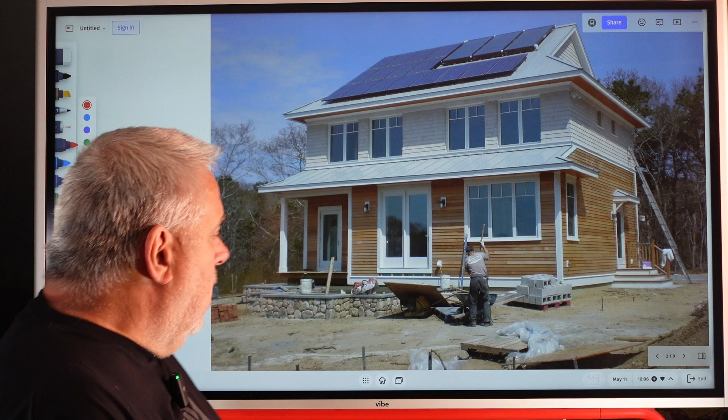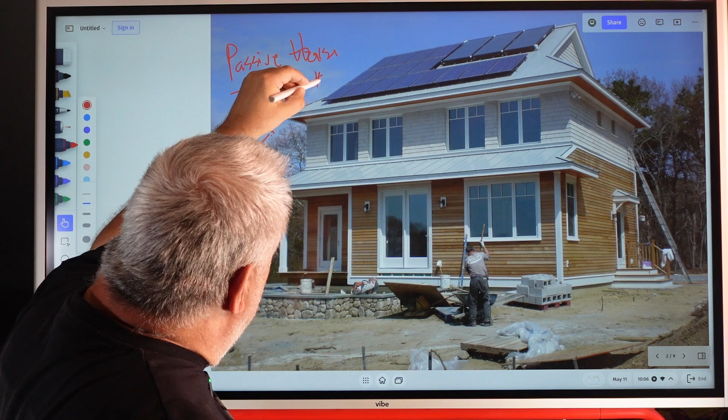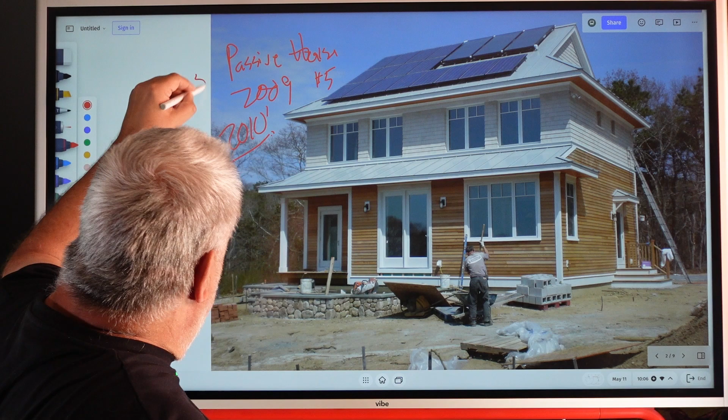Passive house. This was the very first one I ever did. I designed it in 2009. We built it and certified it in 2010. I want to say it was number 5 on the passive house roster in America. It's in Climate Zone 5. It's, yes, up here in New England. It is literally right on the water. You'll see that when we see a couple of these interior photos.

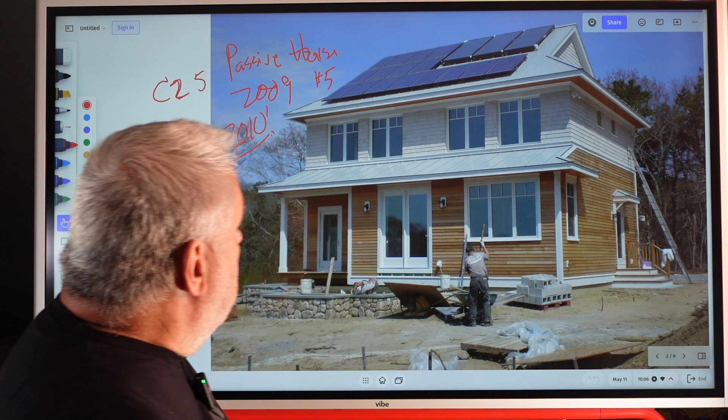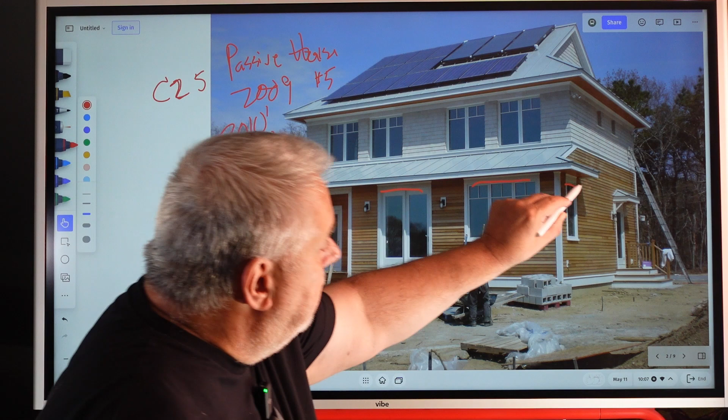And as the third part to our mini window series, which is part of the larger series in general, we're going to talk about the heads of windows. Now, the interesting thing about the head of a window, and when I speak of the head of the window, you know I'm talking about the tops of the doors and windows, right? Now, there's something that all of these windows have in common, and then there's a few differences. Let's talk about what they have in common.

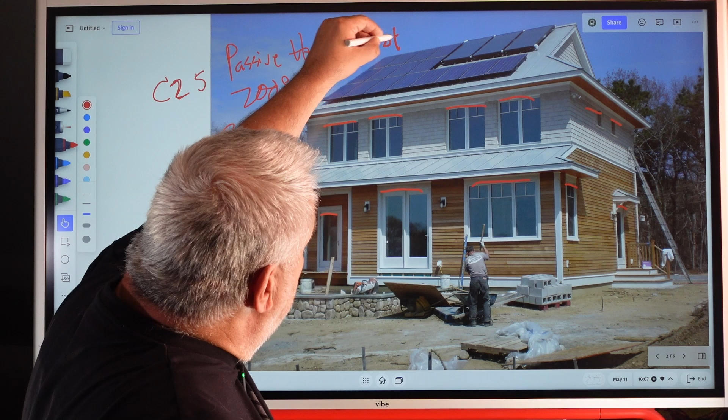If a window's going to leak, the greatest chance of leakage is probably at the head of the window, right? It's kind of like if I go outside in the rain, the most sensitive part of my body to the rain is my head and face. So what do I do? I protect it. Protection, right? I put an umbrella over it. Look at all the heads of the windows here. They all have an umbrella over it, right? They all are protected. I treat my houses the way I want to be treated. How about that?

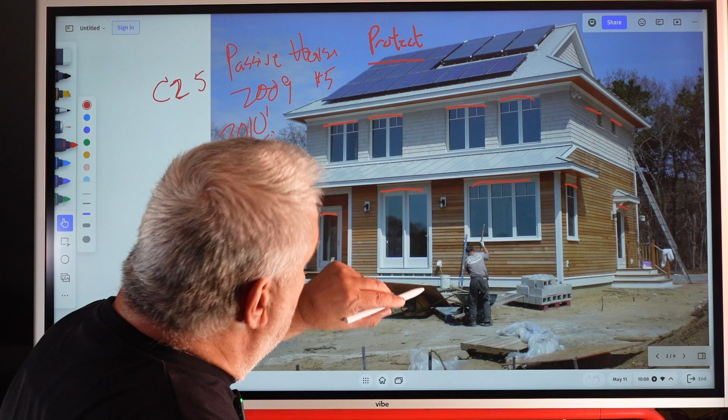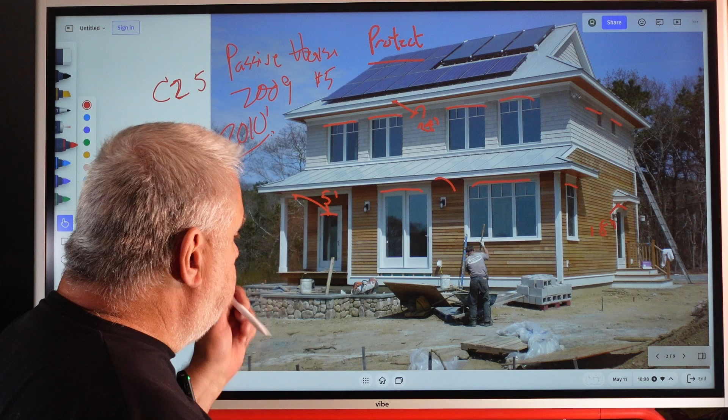And they're all very well protected under some significant, this is on the order of a 24-inch overhang. The same here. This is probably close to about 5 feet or more there. And over there we have at least 18 inches that we're protecting the heads of those windows. So let's talk a little bit about those windows. You can see here, this is a 2-story wall. Not a whole lot of protection there, right?

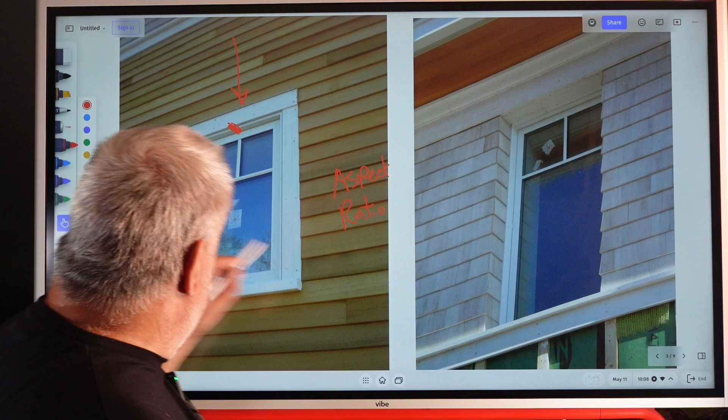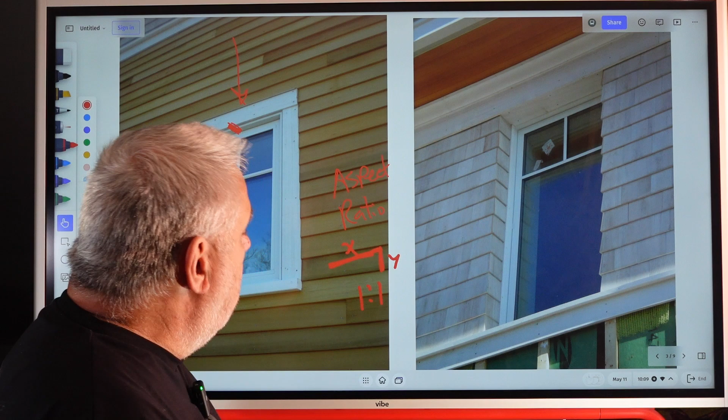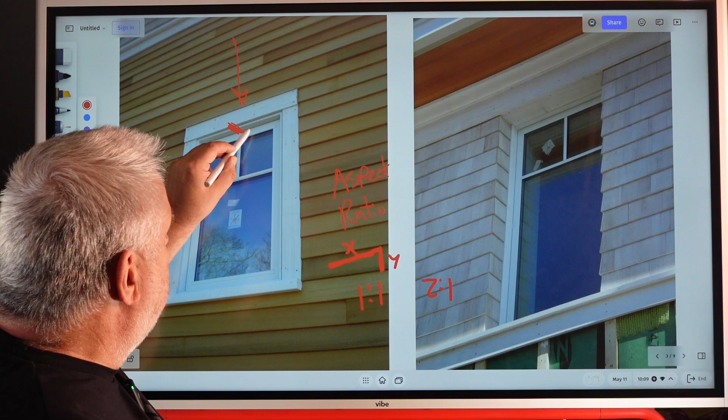And there's this thing, I call it the aspect ratio. The aspect ratio is pretty much how much protection do I have horizontally versus the distance above the window to the wall. So this really for me wants to at least be 1-to-1. If I can get it 2-to-1, where the X dimension is twice the Y dimension, then yeah, I'm extremely satisfied. This one here, our X dimension is very, very little, and that's actually a function of the frame. There actually isn't any overhang here.

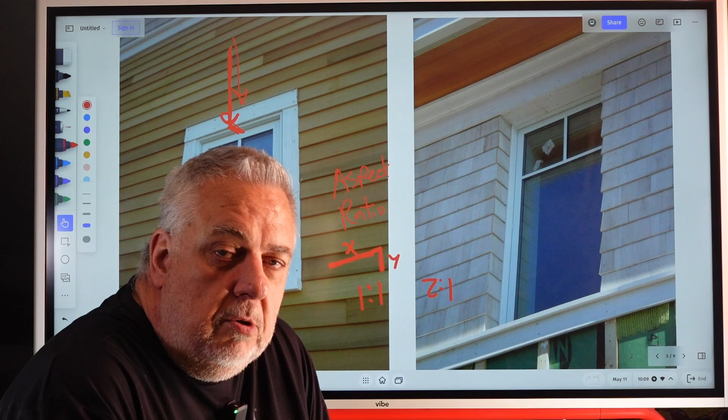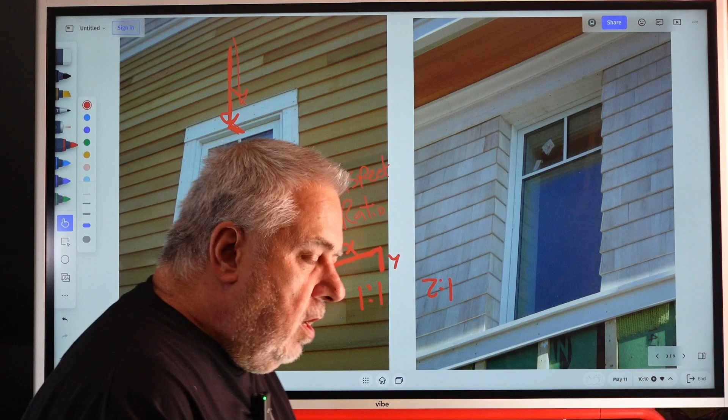So our aspect ratio on that one is somewhat nil, which means that window is one that I should have some of the most concern with, right? Because the execution for flashing and sealing and all of those good things happening to that window have to be spot on. Because we're again in a high wind zone right on the water, that window is going to get tortured.

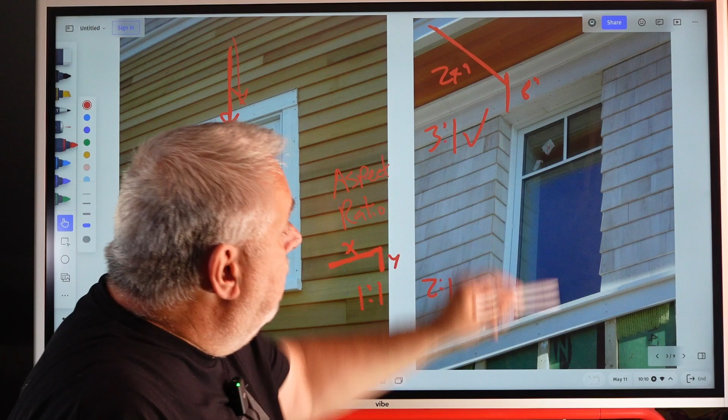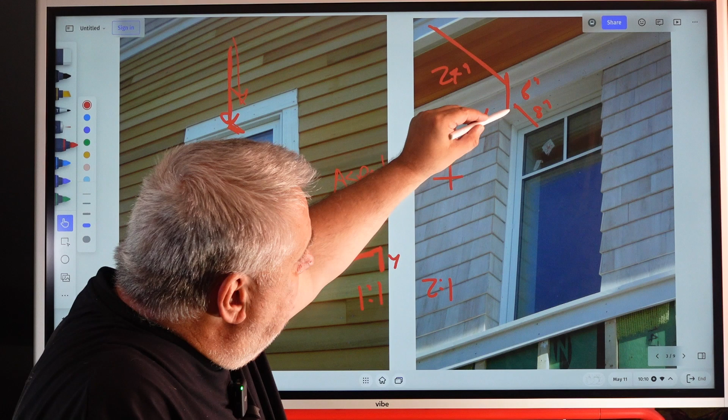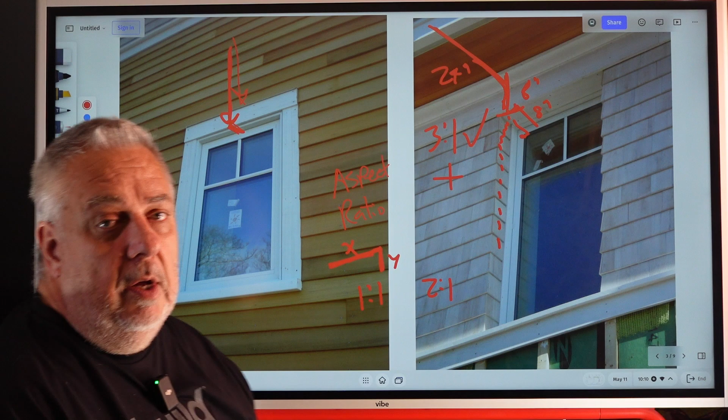This window, however, look at this. We have 24 inches there, about 8 inches there. So that's a 3-to-1, right? That is really good. But it doesn't stop there. We actually have another 8 inches. So it's a 3-to-1 plus, I would call it. And by having this drip, if there was a driving rain that somehow made it here, this water would want to drip down before it travels inward to that window, right?

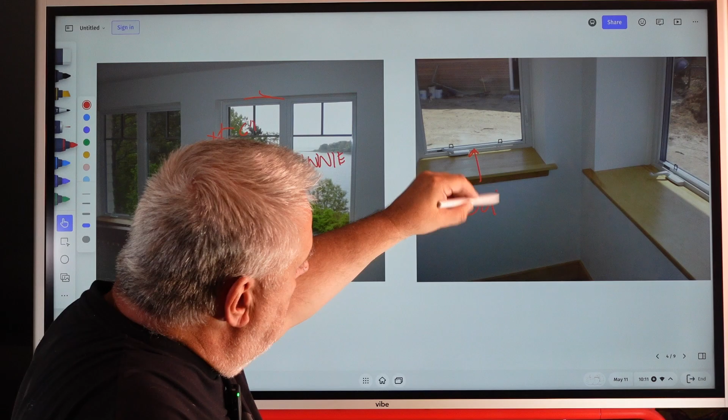Window heads, you know, this was a pretty simple house. These were all drywall returns. You can see this is a very simple one. We're probably on the order of maybe about 6 inches of reveal there. So this one here, because it's in the middle of the wall, some people would call it middies. You can see the clapboard or shingle siding on the outside and then the interior there. So that one's in that mid portion of the wall, or in this case, for my explanation, I've been calling this the innie. And then notice here, this one's pushed all the way out, and we'll call that the outie, right?

So the outies are certainly at more risk because we have absolutely no protection above that. Water comes down, it comes down to the window top, and it immediately challenges that window, as opposed to the windows that are inside. Water comes down and it still has some lateral ground to cover.

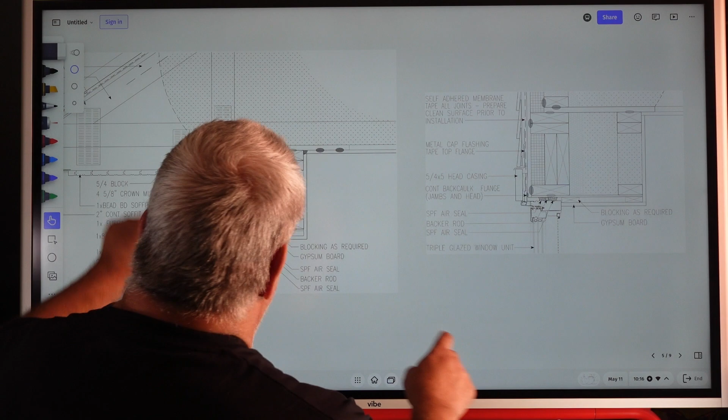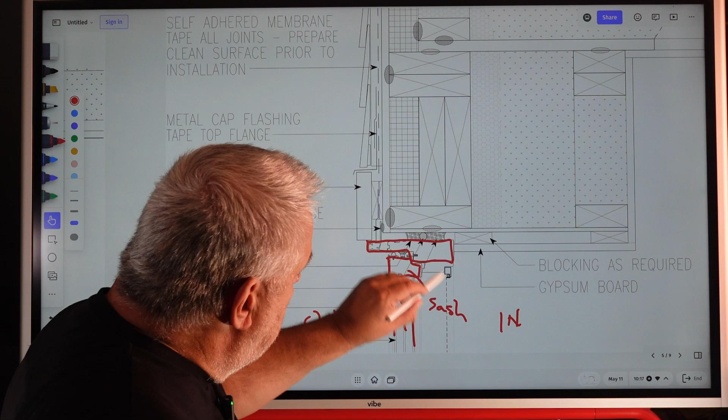All right, so here's the details. We have that kind of mini outie, or innie. Let's focus on the outie first. So make this nice and big, and we can talk about it. You know, very similar to the jamb and sill detail. We have our window frame. This is inside, this is outside, right? You can see our triple panes of glass. This is our sash. And this is our frame, window frame.

And notice the window is pushed all the way outside. So unlike the sill where you pull the window into that middle third as an innie or middy, you expose the sill and it becomes a very high risk. Here, we push the window all the way out, and while it helps the sill minimize risk, it puts the head in a very vulnerable position to leak and not be able to drip water away, and get rid of it by sliding it in, increasing that aspect ratio, and providing a little bit of protection.

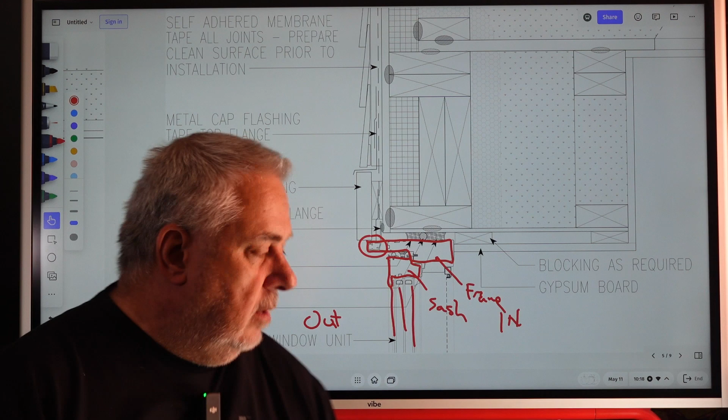Now, notice our sill detail, our jamb detail, and our head detail. Well, yes, they're very similar, right? For me, when I think about detailing a building, the first thing is success, or function. Does that detail work? Does it push water away? Does it handle the 4 control layers in a way that I need it to?

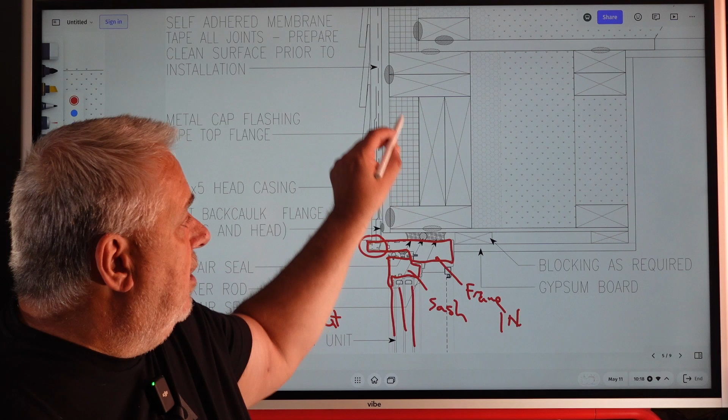Secondly, is the window detail simple, or is it recognizable, right? Are there things in there? Yeah, okay, we have a 2x6, we have a header, this one's insulated, we have ZIP sheathing on the outside. All of those things are very compatible with standard understanding of construction of the day here, right?

And then lastly, is the detail executable? So I can recognize some things, but if you're asking me to cut and twist and bend and fold and do a whole bunch of things, then it really places that detail in question, that it's recognizable, but it's really not simple, and it's really not functional, because if I'm having a hard time executing a piece of flashing tape, then I put that flashing tape at a much higher risk, right?

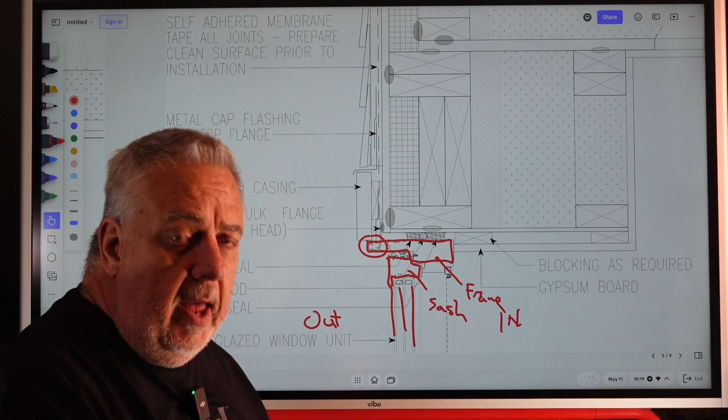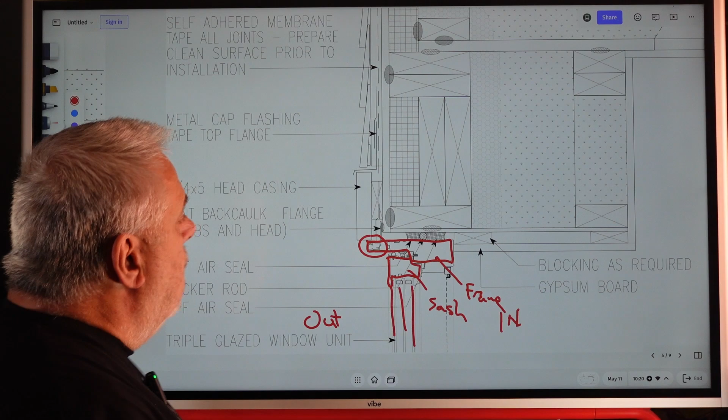So anyways, making the details somewhat homogeneous across the sill, the jamb, and the head gets us to a point where we have a really good understanding. The builder has a really good understanding because they're doing the same thing down here that they're doing here and that they're doing up here, right? Unless we have cause for some concern where the sill's at more of a risk and we have to add a little bit more there. But the window's pushed all the way out. This one here, we call it the outie.

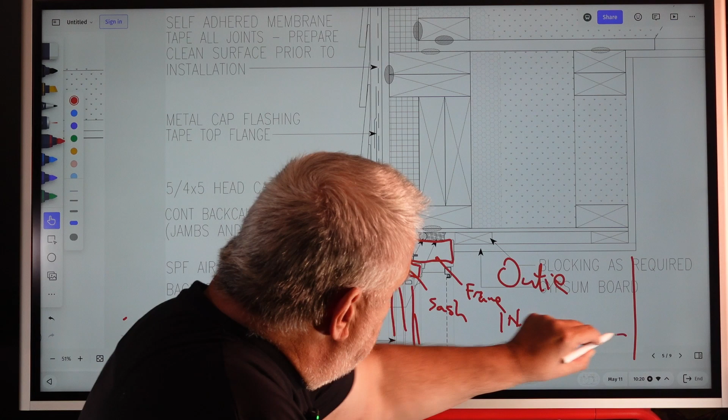And yes, if you can hear them, those are my dogs downstairs and I'm about to kill them. I own 2 Great Danes and they're literally below my studio here. It's early in the morning and they know I'm up here, so they're yelling at me. So yes, it's not limited to the women in my life, my wife and daughters. It's my dogs too. Take advantage of me.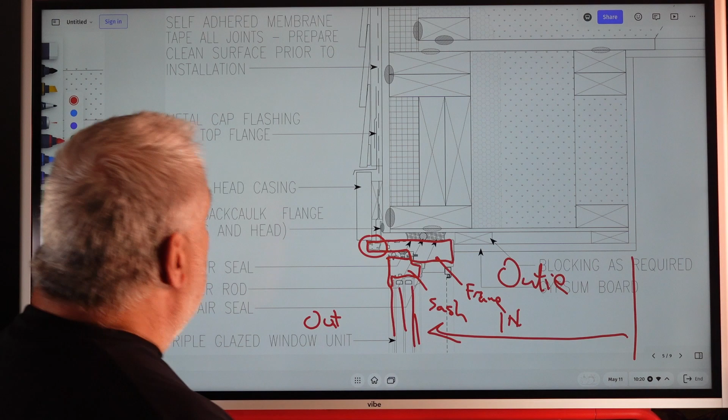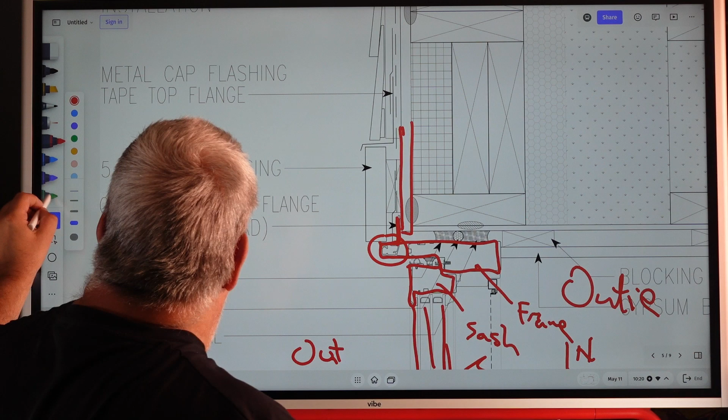So, a couple things of note here. Notice the layer of double protection, right? So we have our ZIP sheathing that comes down onto our framing member. We have our nailing flange there. We then have, in this case here, a membrane on the outside, and this is taped, and there is a gap here. And notice that's probably on the order of maybe 3/16". And it is not caulked.

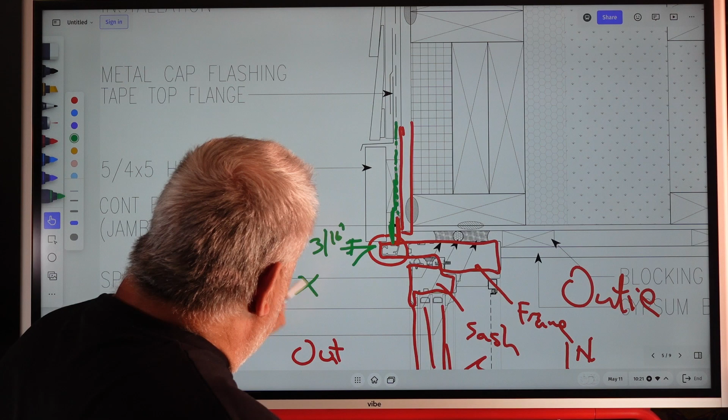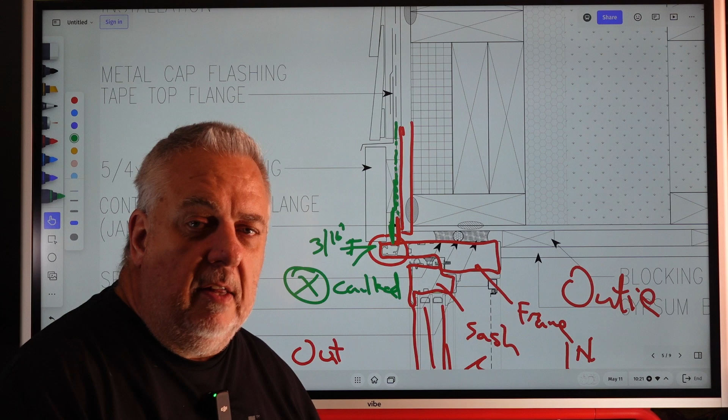I know, the sealant companies of the world are going to hate me, but the minute you pull out a caulk gun, the very first question you should ask yourself is, what am I sealing in? If I seal that and water gets in here, it's either going to be forced in or it's going to sit out here and rot something, right?

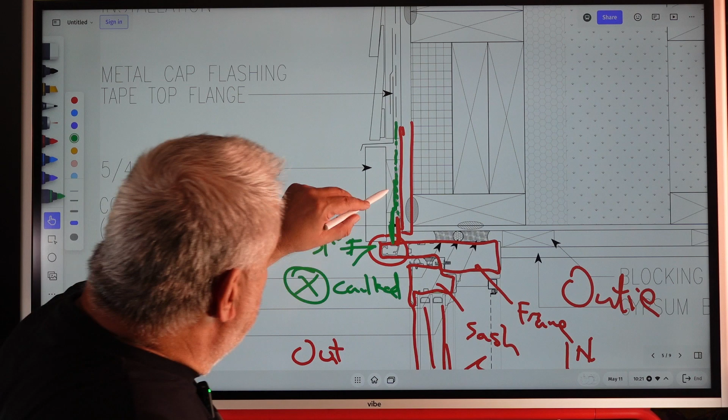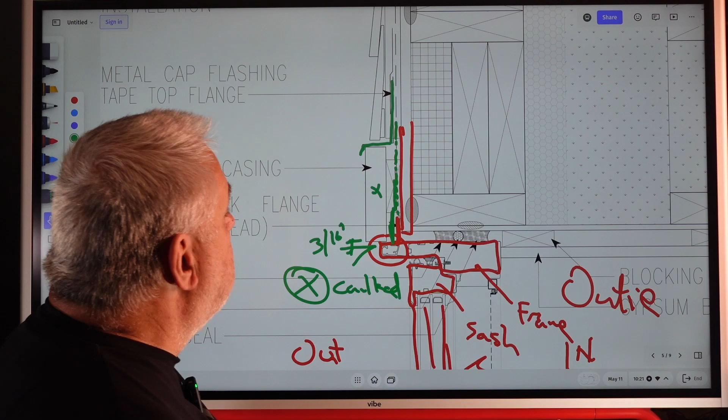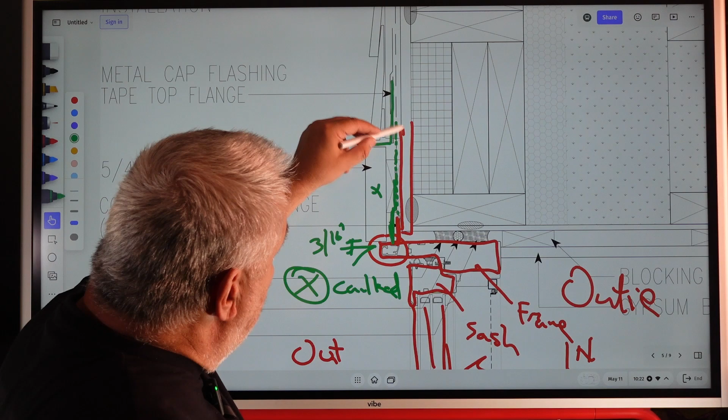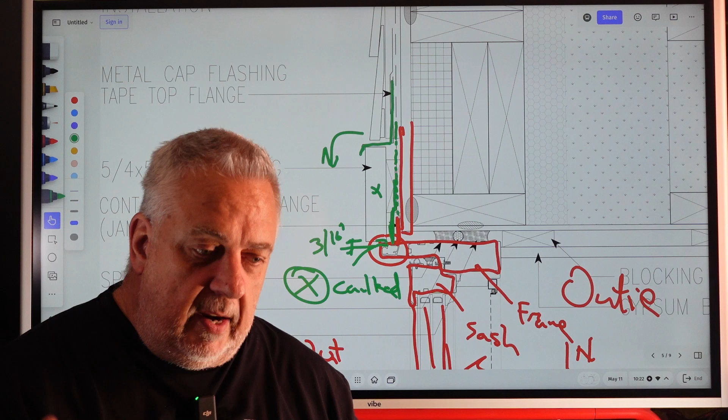By having that 3/16" space, anything that gets behind this flashing, right? I have a piece up here also, and that's flashing my trim piece there. So that's kicking water out above my head casing, but below my siding, and then that's taped back to the system. But if any water did get into that system, I have that little 3/16", let's call it a relief valve, and we can absolutely push the water out through there should any get in, right?

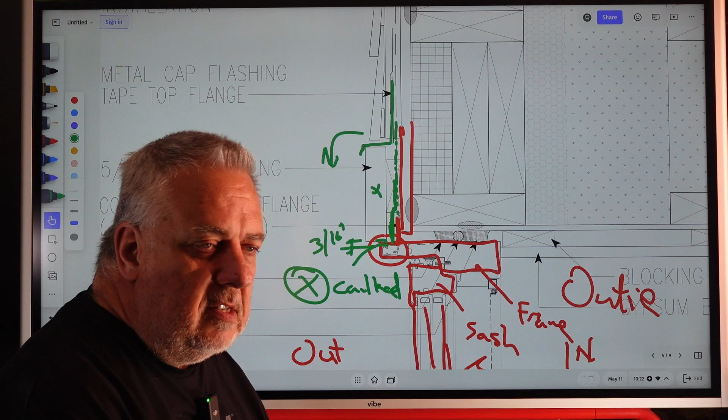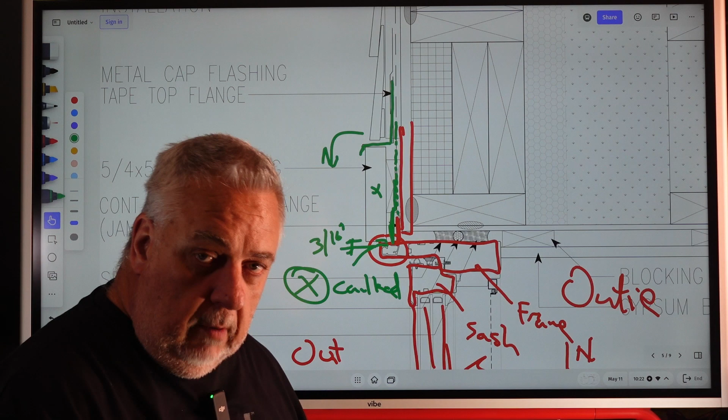So, and notice that's not caulked. You know, it's one of those things, I know sealant, a lot of people use them. One of my pet peeves is returning to a project 4 or 6 months later and the caulk is, you know, instead of being the white that it was, it's now a dark gray because it's gathered up a bunch of dirt, and it just never really looks good to me. I would rather just have a little shadow line, open joint, knowing that water can certainly get out if I need it to.

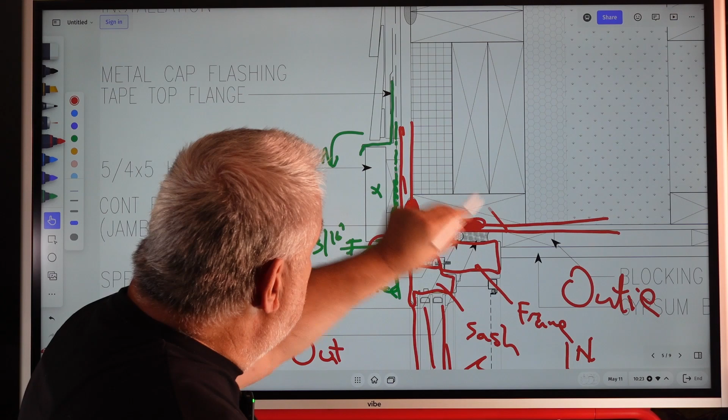So my zip on the outside, my closure piece here, and again, belt and suspenders. This is taped, that joint, but I also have beads of sealant. So I'm sealing this to the framing member, sealing this to the framing member, which means this is sealed to that by virtue of a few smaller connections there. And then that gives me basically a weather-resistant barrier on this plane and primary air barrier. We'll call it the PAB. Yeah, we coined that right here, the primary air barrier.

And so we come in and we put in our backer rod. Looking for that word. And then expanding foam sealant, inside and out, and that basically makes the connection from our window frame to that piece, right? And that piece is connected to this piece, our primary air barrier, and that piece via some weather stripping connects that to the sash.

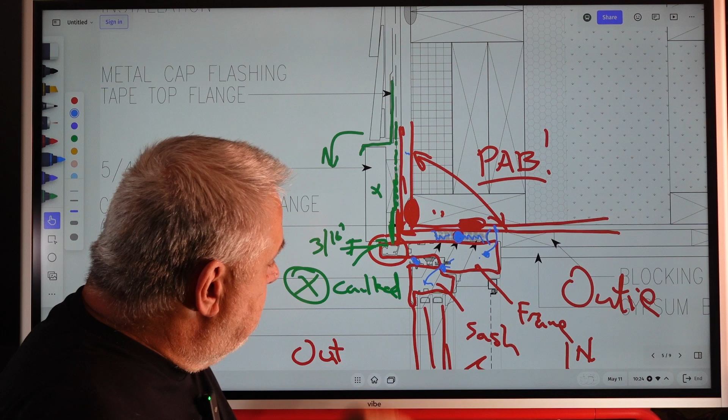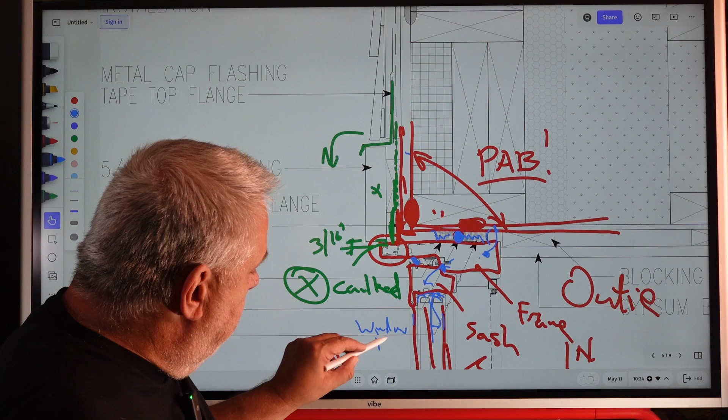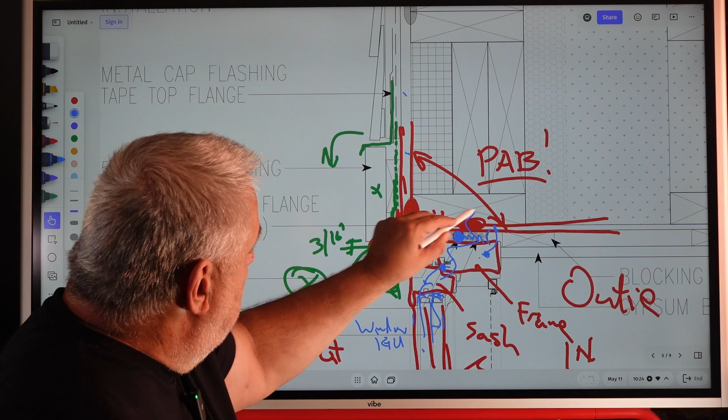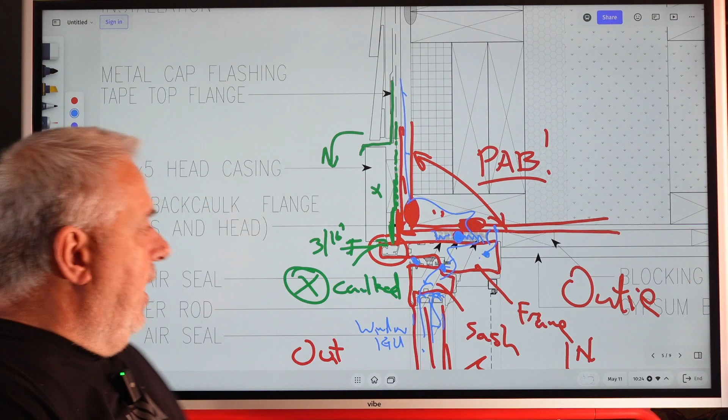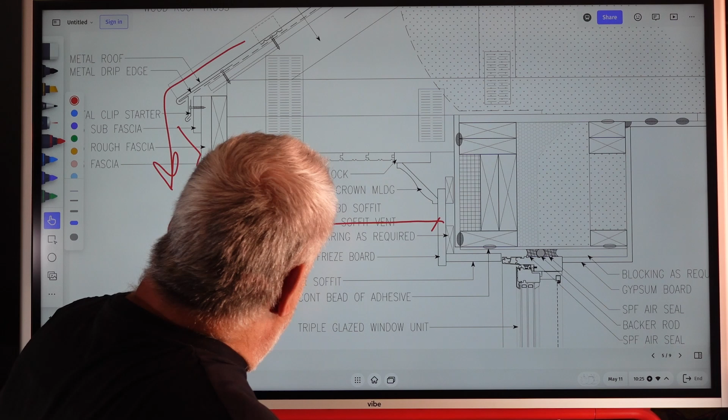If we come over here and look, this one here, I can't move that all the way over because this one is on the roof. Let's look. We have water. It falls there. If water does fall there, we provide a drip there, so hopefully it falls there. But if not, we have this 24 inches. This is about 8 inches, right? 3 to 1 on that aspect ratio. Also notice, if water did get in, there is no sealant there being shown. So we can drip water out.

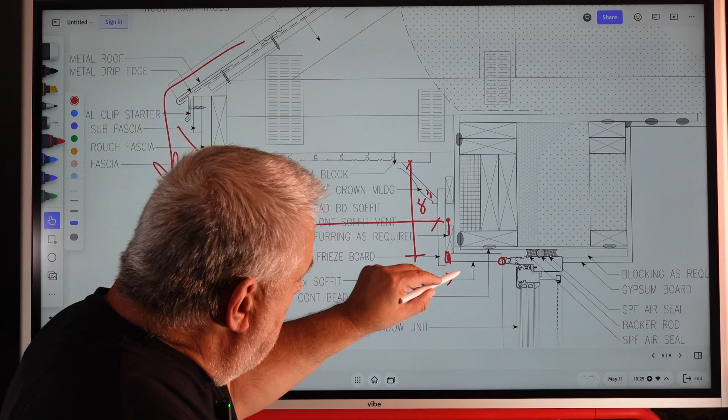A lot of times, and I didn't do it here, but I would have in the past, I'd push this up a little and I would have a little gap here because you're never going to really see it when you look up. You're going to see this bottom edge. You're not going to see that. But a lot of times I'll provide a 3/16 inch gap right there. And so if any water gets in behind all my trim system, it can just drain out, and it drains out well in front of that window.

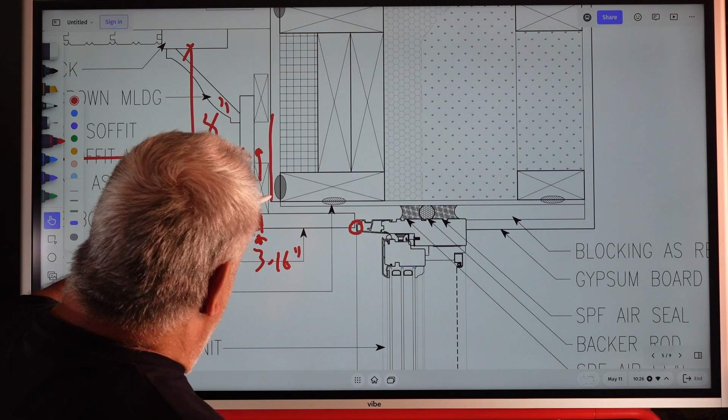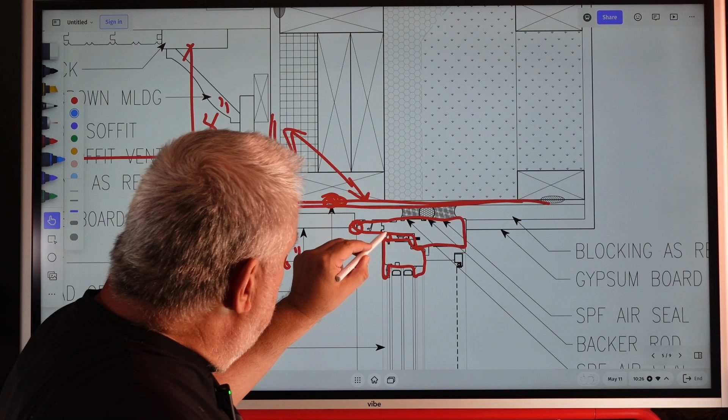And then coming in here, pretty much everything looks very much the same, right? Our primary air barrier there, and across here, our bead of sealant, bead of sealant. So those two get connected. Our window frame, our window sash, right? And then we have the connections of weather stripping there, the IGU connection to there, our backer rod there with some expanding foam there, and there, this connected to that, connected to that, connected to that, and it goes around the house.

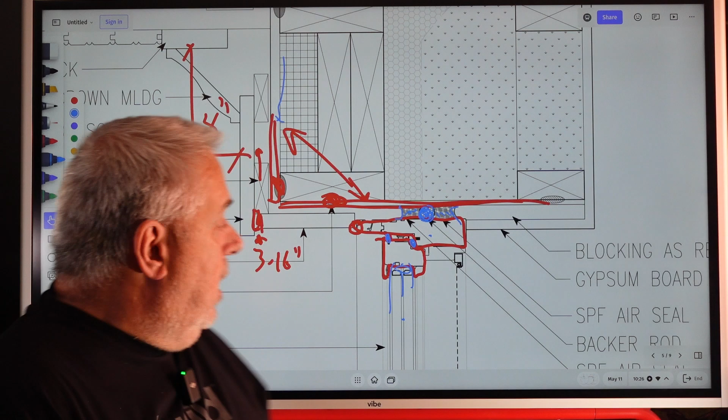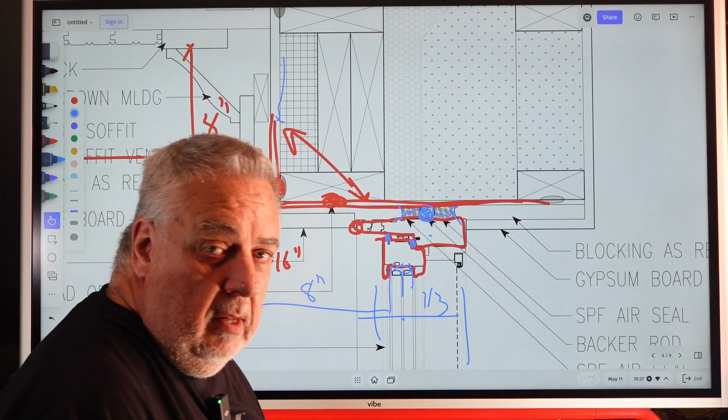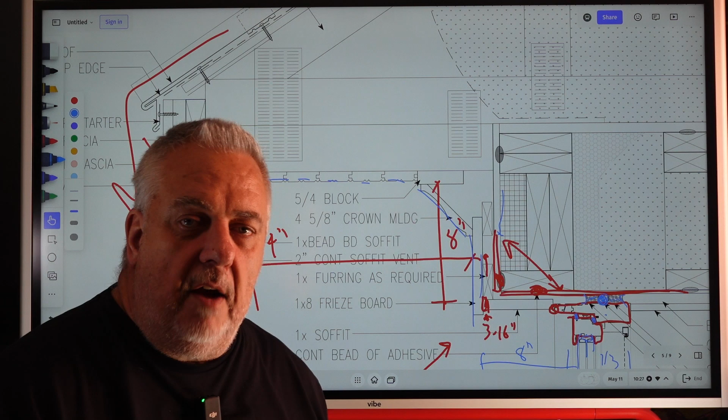As far as water management, I get that additional 8 inches here. For the energy nerds in the world, this is in the middle third of the wall, so we're good there. All of our stars pretty much align for a very, very successful installation. And then, of course, doing things like putting in the crown molding, the fascia here, our beaded soffit, our ventilation for our roof, all of that stuff is above and beyond once we've solved for the risk of water on that. So anyways, those are the window details. Hopefully you enjoyed that. Window details are certainly some of the funnest things for me to draw.